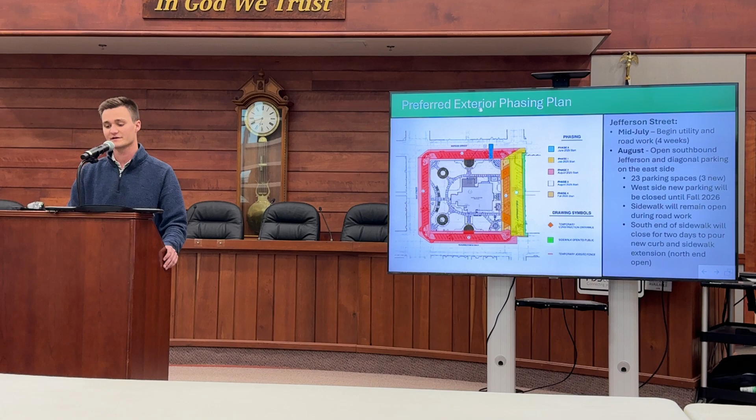I know when we first brought this project and our phasing options to the commissioners, that was the first thing they said, that it has to be open for Small Business Saturday. So we're very aware of that, and we know it's a hard deadline we can't miss. I know a popular question is about weather and unforeseen conditions, but we selected a contractor that's done work much bigger than this, undertaking a lot of projects up in the Indianapolis area, and we feel very confident they can get this work done and turned over prior to Thanksgiving.

We wouldn't be standing here right now if we weren't confident in that, because like I said, the last thing we want to do is overpromise and underdeliver.

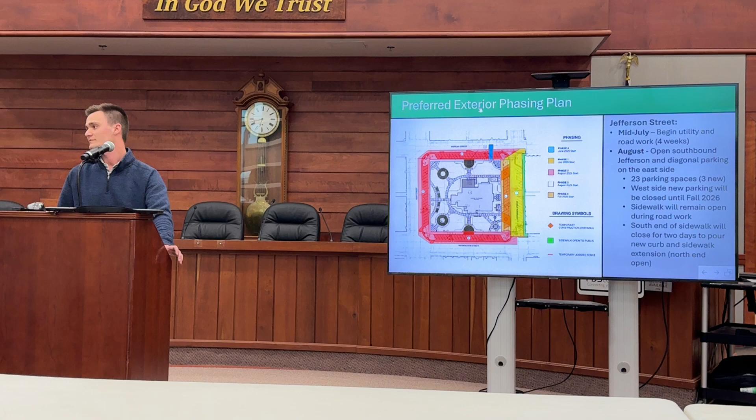Okay, a couple things from questions that came up in our first presentation I want to make clear to everybody. This red is to the center line of the road approximately, it's not the entire street, so Iron Agent will maintain traffic around 3 sides of the square all the time with their maintenance of traffic.

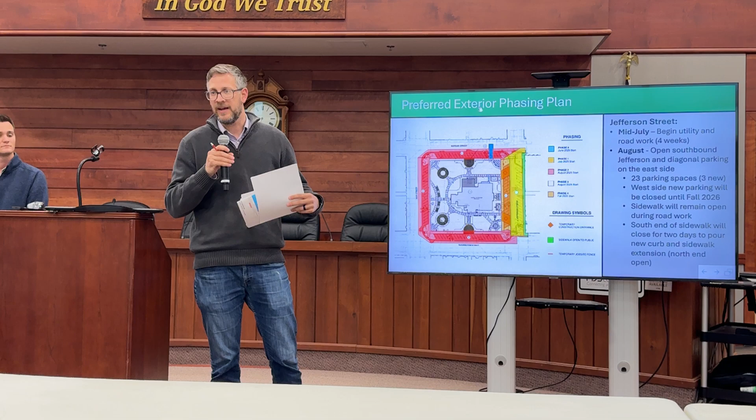Second thing, when they turn it over at Thanksgiving, the project's not done. As we've said, this is going to go on for a number of years, but the construction limits will come back in entirely into the county side, and the streets will be back open at that time. The other thing I really want to point out, when we close down the courthouse, that's going to be about 65 people that are not working downtown throughout that process.

Can anybody give me a guess at what they think is the number of visitors to the courthouse each day? No guesses? Eric, what do you think? I didn't know it was so.

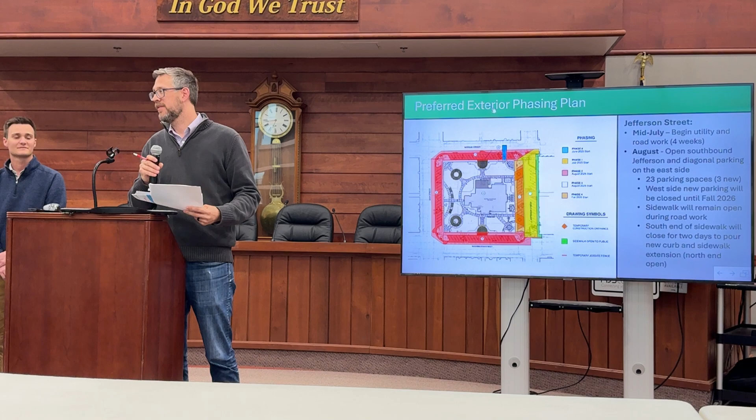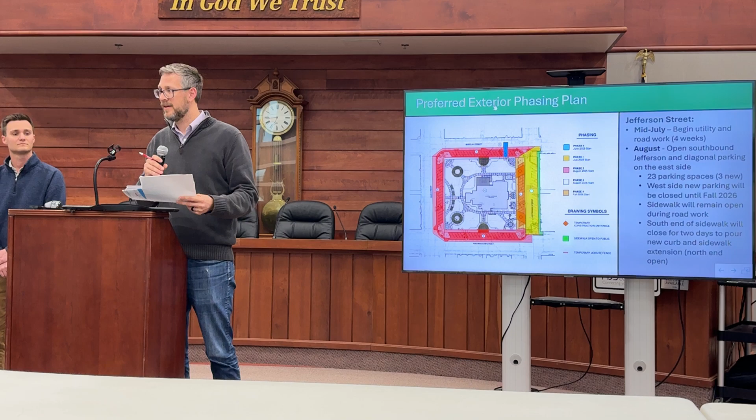The courthouse staff security tracks the number of visitors that are not employees. If you look at it on a 365-day basis, which would be very conservative, there's more than 170 people each day. That's not including the folks visiting the probation department each day. If you just assume conservatively that 30% of the volume of the courthouse goes over there, that's 225 people per day. We add the employee count that's not going to be there, and somewhere in the range of 275 to 300 folks are not going to be at the courthouse day in and day out while we're doing this project.

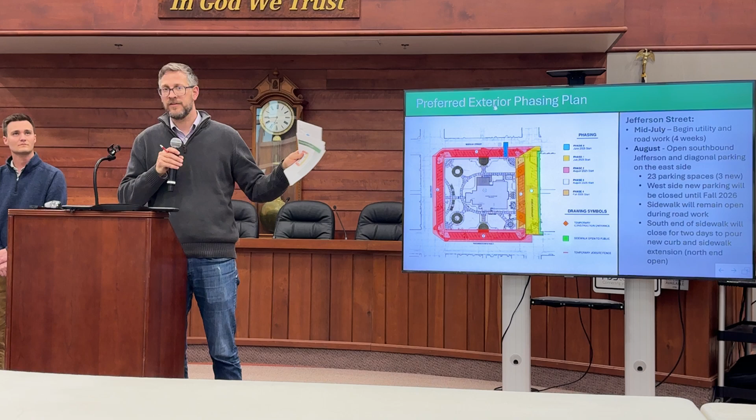Will's going to talk more through numbers and spacing, but I just want to make it really clear that yes, this is going to be a huge impact, but you're going to see a ton of folks that are not there as well.

Thank you for clarifying, Josh. And to build on what he was just saying, with that one lane closure, you are going to have westbound Morgan Street open, southbound Main Street and eastbound Washington Street open during construction, during phase 2. And then once phase 1 is complete, southbound Jefferson Street would be open.

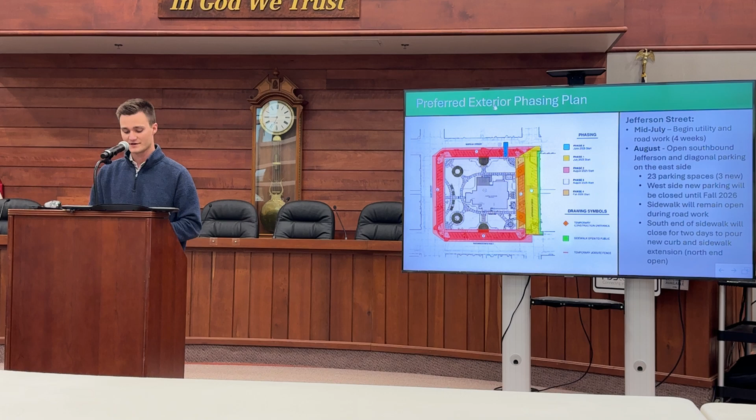You'll see phase 4 is in orange, phase 3 being the interior site. Phase 4 would be turning over that final west side of Jefferson Street. As we finish site construction, we'd use that as our construction entrance. It's the safest option that's not going to disturb traffic on Main, Morgan, and Washington Streets. That would be within our site limits. We just wouldn't be turning over those spaces until the end of the project.

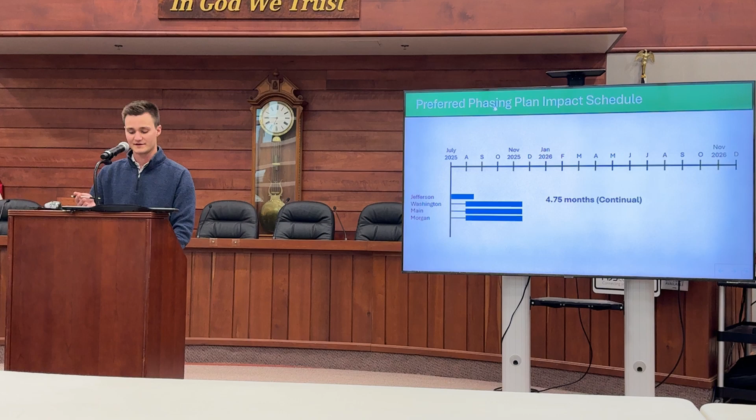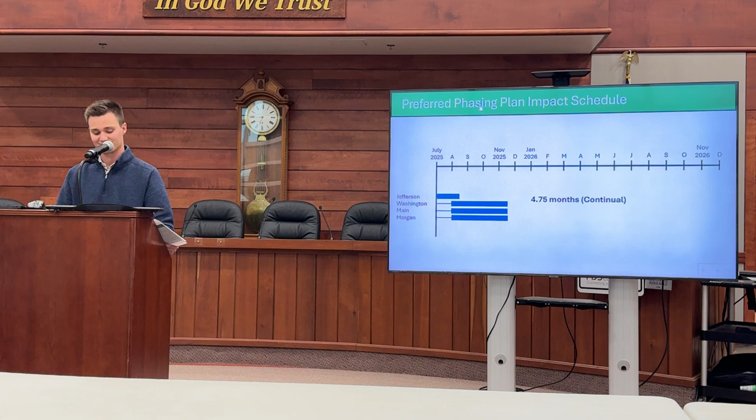So this is just a quick overview of what we'd be looking at as far as schedule for turning this over, based on this preferred phasing plan. We're looking at an impact of around 4.75 months, which is everything done and turned over by that Thanksgiving date of 2025, minus that phase 4, which would be the west side of Jefferson Street.

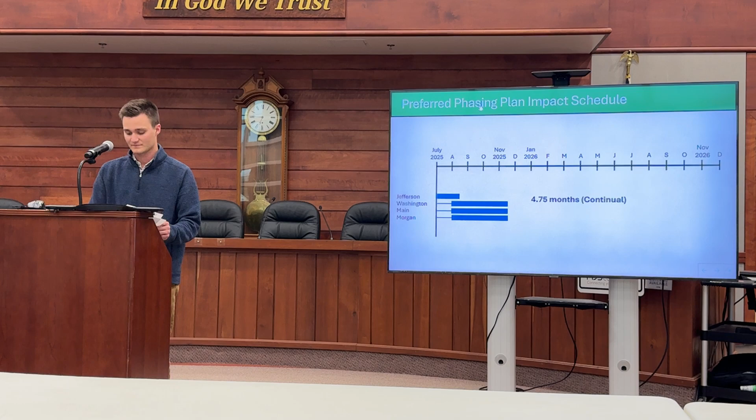So let's look at the first alternate plan. It's essentially the same layout as the first preferred plan that we looked at. The difference is Jefferson Street in its entirety would be done at the end of the project.

So that would be in fall of 2026, winter turning that over. The difference here is our phase 1 would start that first week of August after everyone's moved out of the courthouse.

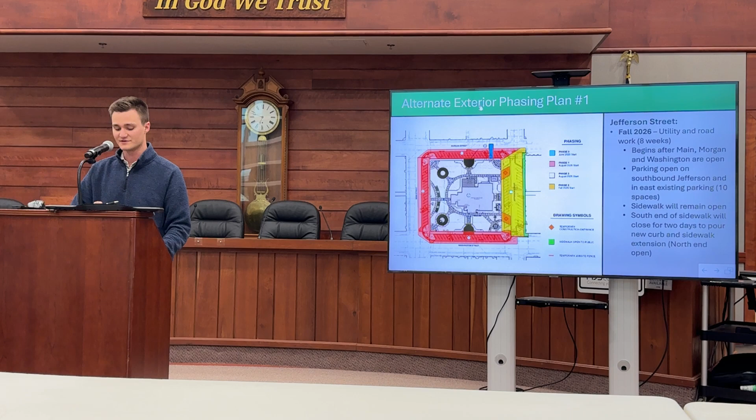So the difference there is one, at Jefferson Street not getting turned over mid-August anymore, so you have a few less spaces there on the east side of Jefferson. But as far as the Morgan and Main Streets go, essentially the same, turned over by Thanksgiving, and that's the same sidewalks, ADA ramps, and utilities. Everything is done in those streets. We're pulling our site fence in, like Josh had mentioned before, and then we're giving those over to the city.

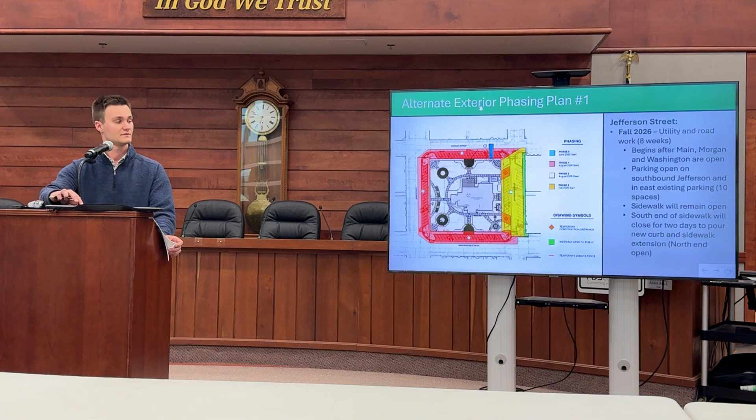So then a recap of the alternate plan. Like I said, it's basically the same. Washington, Main, and Morgan are turned over prior to Thanksgiving 2025, with then Jefferson Street out into fall, first of winter of 2026. The reason it's a little bit more of an impact is, yes, you have the gap there,

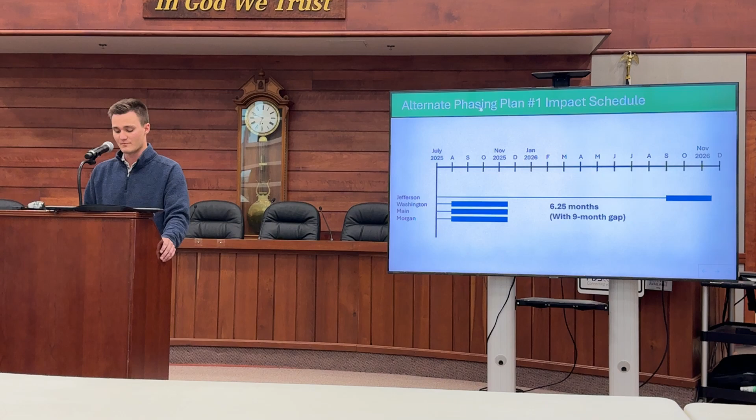but then you also have a remobilization, and you're taking that full Jefferson Street, so you have to figure 3 to 4 more weeks for that side to get all that utility tied in and complete.

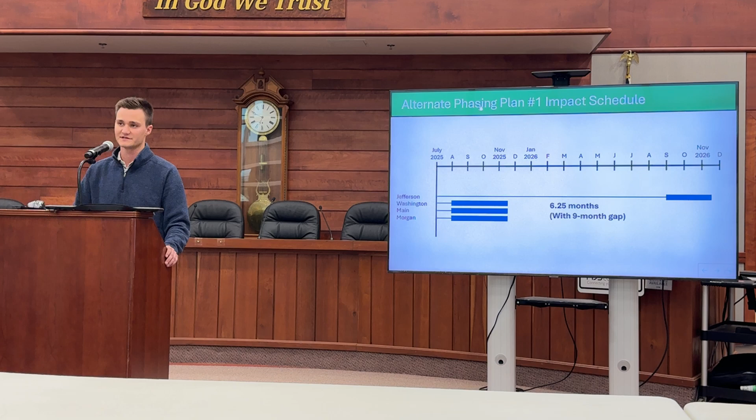So the next plan we're going to look at is really taking the phasing and drawing it out over a period of time due to breaking it up. Now this would be if the concern of closing one side of Morgan, Main, and Washington Street at the same time feels like too much of an undertaking to the community, then this is the alternative.

And the reason we really went away from this while we were talking about it early on is that it draws out that construction over close to the duration of the project, 18 months, rather than trying to get it all done early on. And what you run into is with our start time, the winter and asphalt plants, and not knowing when that's going to open back up, it's hard to give an exact timeline of when we can turn that over. So this is, like I said before, we don't want to overpromise something and not be able

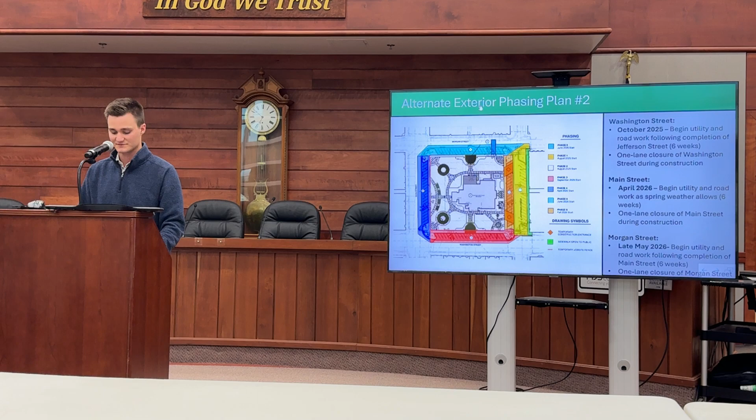So like I mentioned, then we'd move from Main to Morgan Street, which would be started in late May 2026, turned over in July 2026.

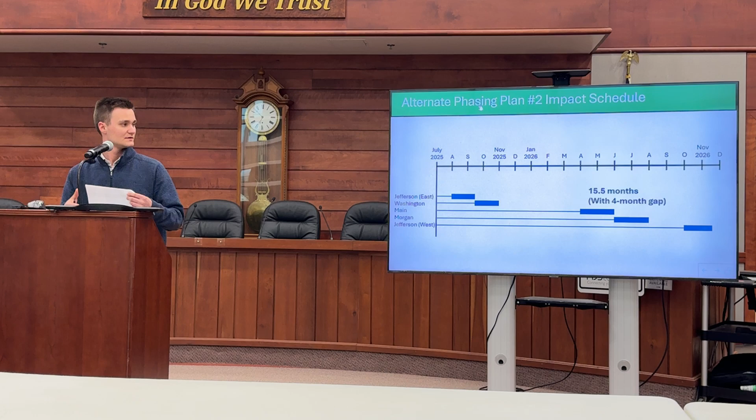Just as a visual here, you can see Jefferson and Washington streets turned over prior to Thanksgiving 2025. We take that gap and then start that work as soon as we feel comfortable we'd be able to place final asphalt. We wouldn't want to open it up, asphalt plants aren't open, and then it remains open and sitting for weeks until weather improves.

So that's what this is showing: an April start, more confident that's when we'd be able to get everything completed as quickly as possible, turned back over, but with the phasing, so we would not be starting that next Morgan Street until Main is complete and so on and so forth. That Jefferson side west would still be the same as all the other phasing plans where we're using that as a construction entrance, then turned over at the end of the project in fall, early winter of 2026.

So a quick schedule comparison of the three options we discussed. The preferred option is ripping off the Band-Aid, giving those three perimeter streets an early start on Jefferson, and really trying to get that all turned over prior to Thanksgiving 2025, and then we're out of your hair. Site fence moves in, we're going to be working on interior site work. The west side of Jefferson Street would still be used as a construction entrance, but we no longer have the one-lane closures on the perimeter streets, and we're turning over a higher parking count with that new diagonal parking.

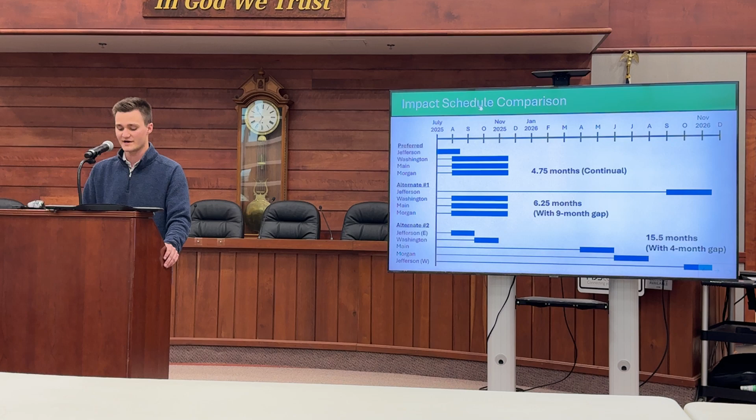One thing we did want to address is that as we're losing these parking spaces, the question comes up: where are the contractors going to park? Because you're right, we're going to have a lot of contractors on site. We estimate during interior construction anywhere between 30 and 50 at a time. So we've designated specific lots for them to park. We will not be permitting them to use public parking. We want all the parking we have to be available to the public.

So we've designated the city lot at 214 North Main Street, anything inside the site limits, which may fluctuate throughout construction, but we'll do what we can to allow our people to park on our site. And then 69 West Columbus, which is the new lot just south of us here at the judicial campus, that we would be using for contractor parking.